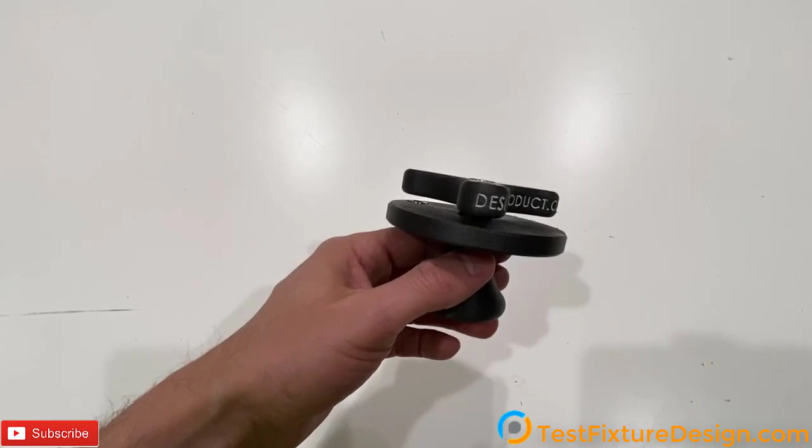Although we specialize in medical device test fixtures at Pipeline, every now and then we like to send our customers gifts. Check out the custom-made triple threat fidget spinner, made nowhere else other than us. So number one, you can spin it like a fidget spinner, but then it snaps into place due to magnets.

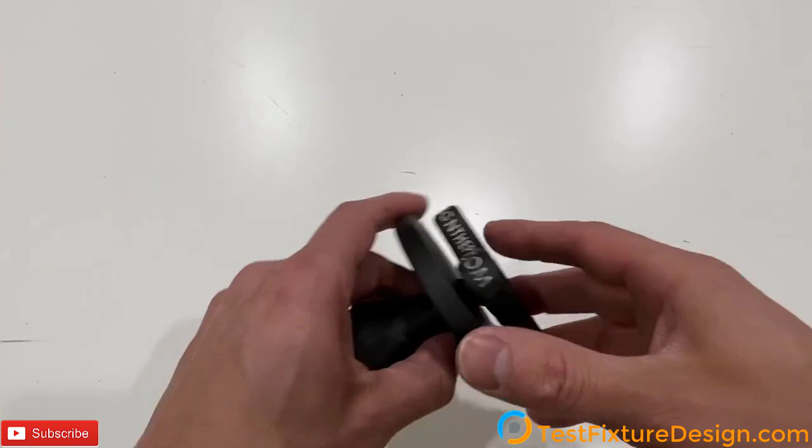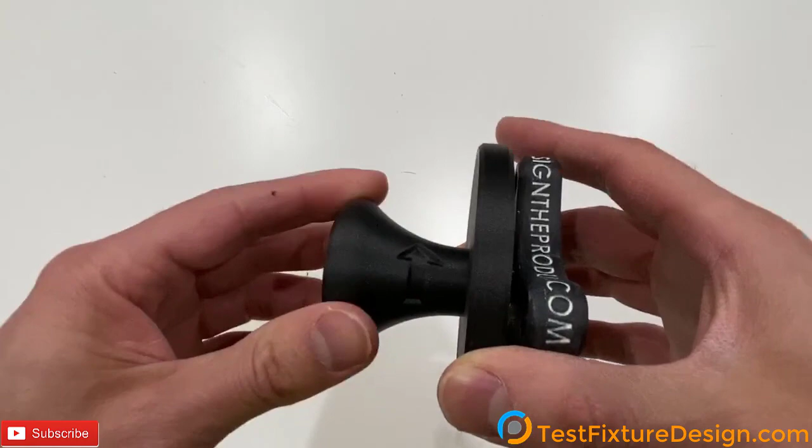Number two, you can twist it and it snaps due to magnets in the bottom. Gives you that satisfying snap that'll keep you snapping all day long when you're in your phone calls. Number three, due to the rounded designs in the bottom, if you spin it hard enough, it turns into a spinning top.

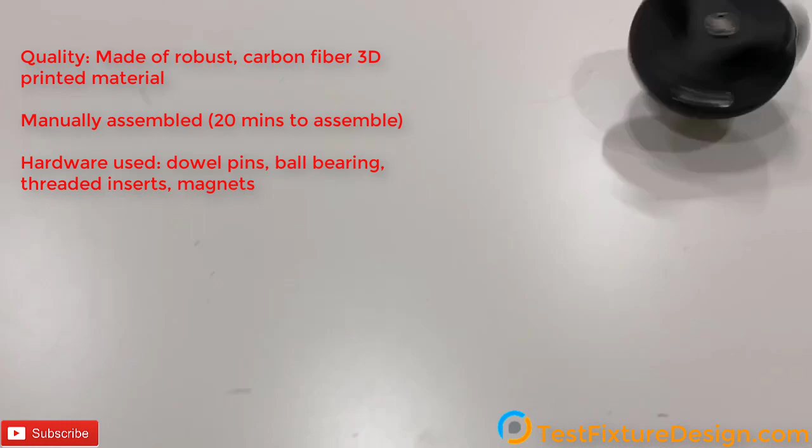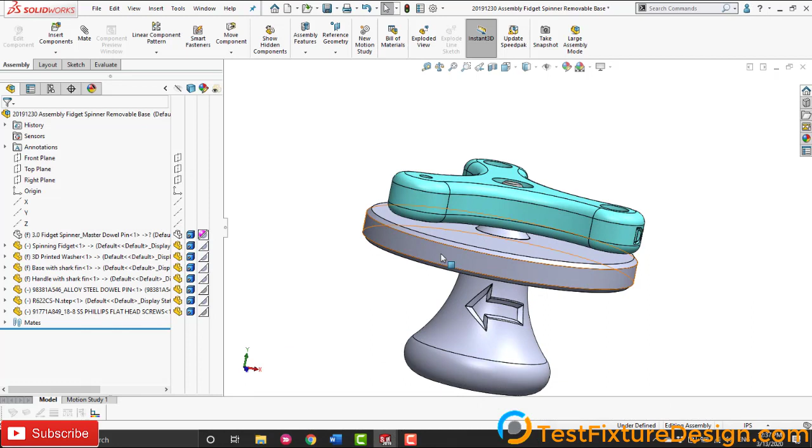Let's take a look at the CAD model and some of the work that was put into designing this. So here we have the assembly file, and please let me introduce myself. My name is Rafael Testay, and I'm a mechanical design engineer here at Design The Product Design and Engineering. I wanted to put a face to a name, and a face to a voice rather, so that you can know who I am and we can start building that personal relationship as you watch our videos.

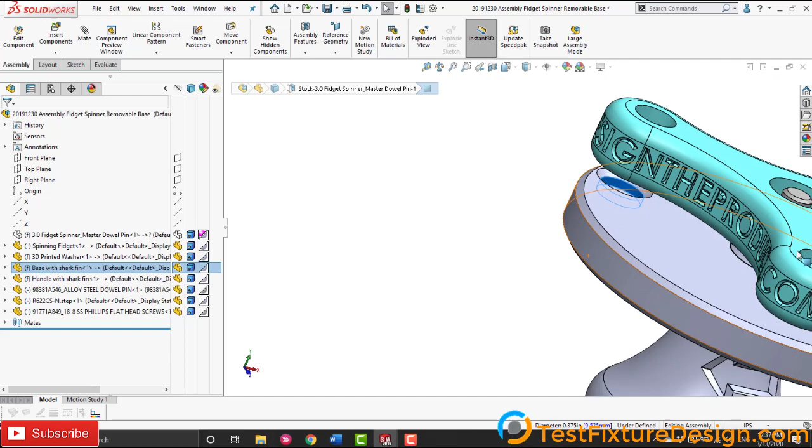So the assembly file, here it is. It's mated, and it should function like it functions in person as it spins. But you may notice that some of the hardware is missing, like the magnet that goes in here. There's a magnet that goes under one of those arms. There's a ball bearing that's also not here.

So why is the ball bearing not here? Because we got the ball bearings off of Amazon, because it's cheaper to get those ball bearings instead of from other providers. And Amazon doesn't have a CAD file for those ball bearings. But as long as we have the measurements, it's totally okay. So that's why that space is missing.

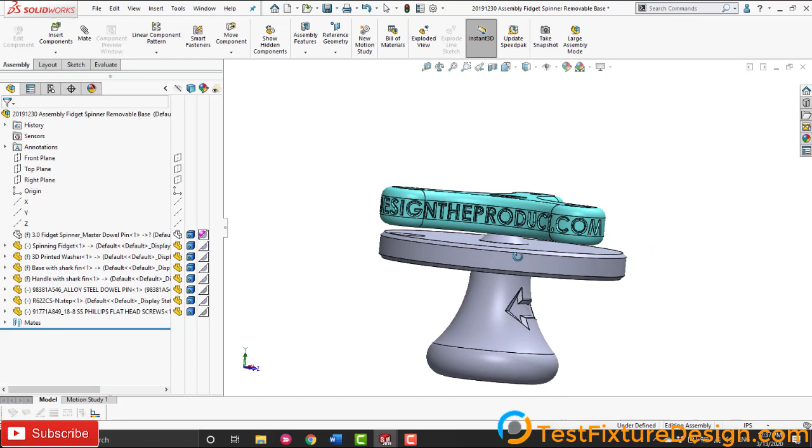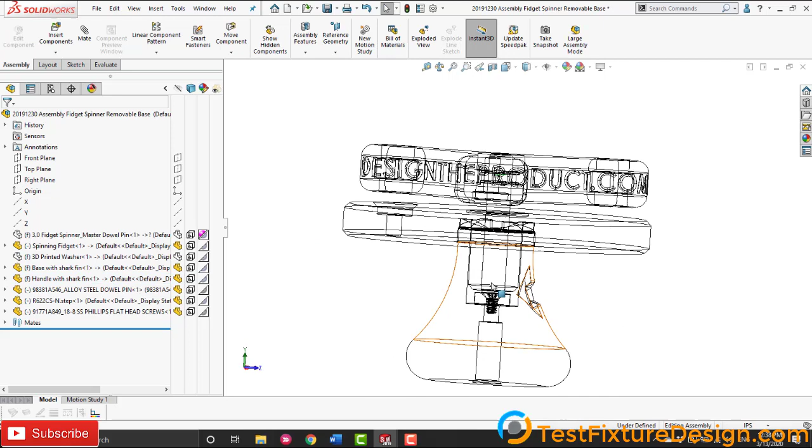So let's take a look at how everything functions. We have a washer that was 3D printed. So let's start hiding some of these components. And we have the disc here, the ball bearing that goes through, the dowel pin that goes through. And let me take a look at this in the wireframe view so now you can see what's going on inside. See that dowel pin going through?

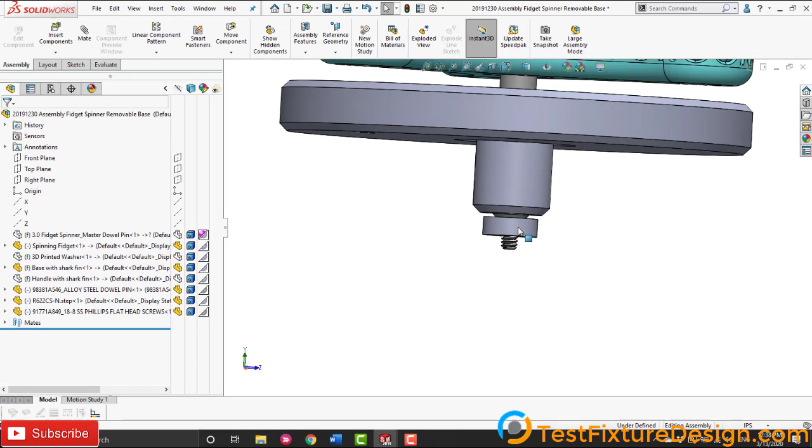And there's going to be a threaded insert here with a screw, and this is another magnet that's coming in contact with the dowel pin. And let's add some color to this or bring it back to normal. And there it is. See, there's a magnet inside that bottom part, and that's coming in contact with the dowel pin, and that's causing the magnet to stay. It gives you that satisfying feel when you take out the base and you put it back on.

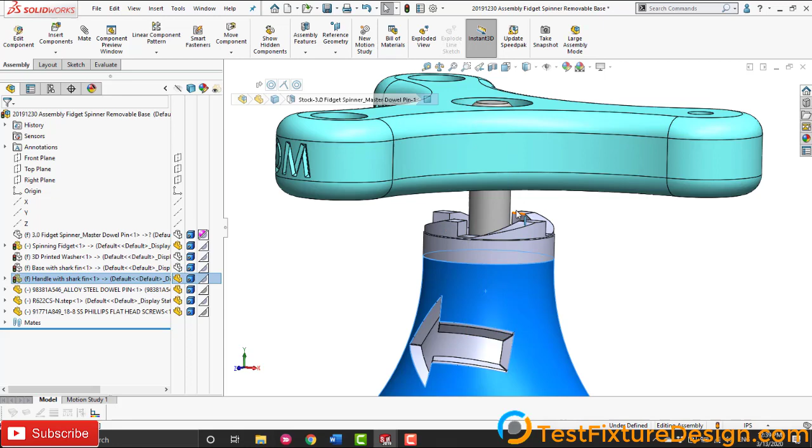Now, one of my favorite things is the design that I made for these shark fins. So when you spin the base, highlighted to the left, the fins will cause it to move in the upwards and downwards motion. And that's going to create that snapping sound that I showed in the video before. So this is the assembly file. Let me show you what I did before this to get to the assembly file.

We do something called master part modeling, and it's just a part file. And all these sketches are here, and we build all the parts in one part file, and then we do save bodies.

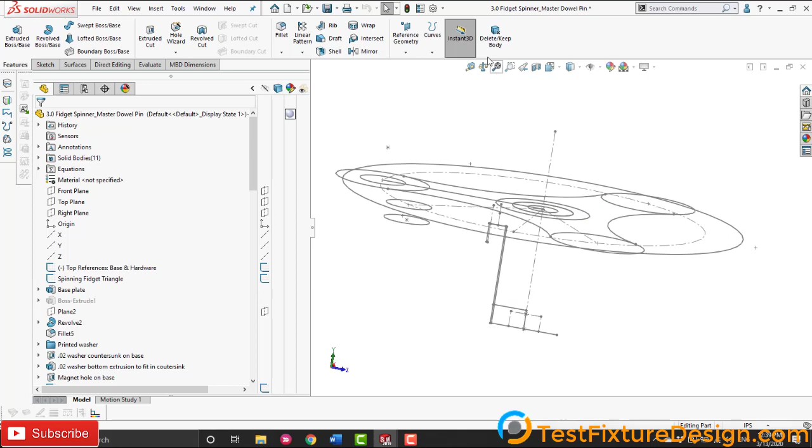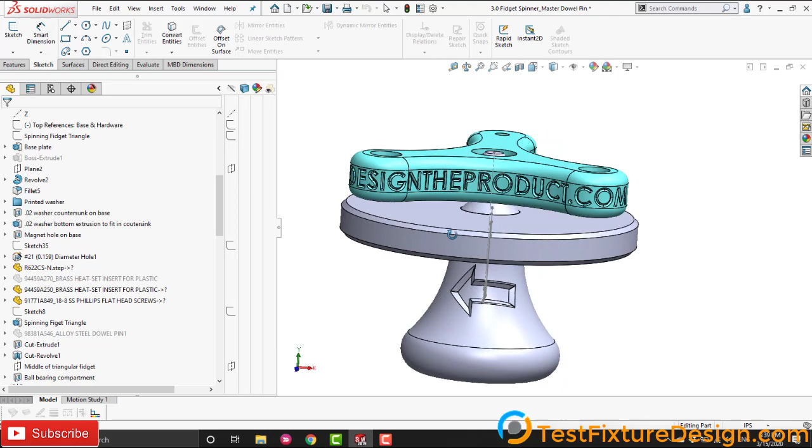So I'm going to show you the three most interesting things about this CAD model, at least the ones I thought were the most interesting. So this washer is 3D printed. And the way that you have to make this washer in order for the fidget spinner to spin and work is when you have a ball bearing, the top surface of the washer can only interface with this ID of the ball bearing.

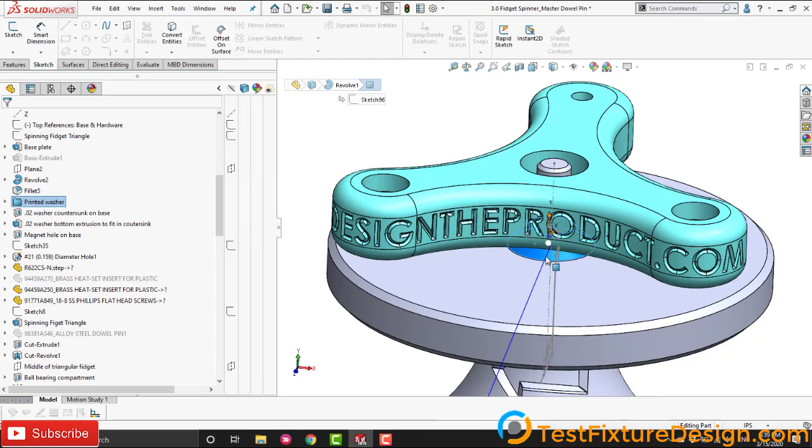If the top surface of the washer touches both the ID and the OD surfaces of the ball bearing, it's not going to be able to spin. And I figured this out by disassembling a fidget spinner. So it works appropriately, like I showed in the video.

Feature number 2 that I want to show you is this text that you'll see here.

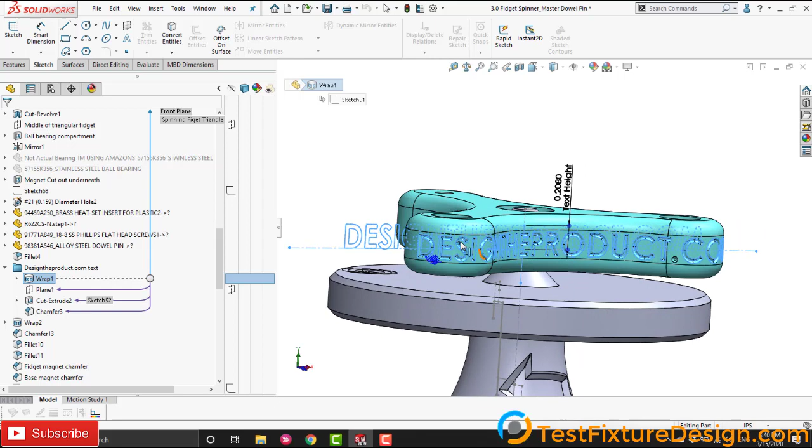But the text is a wraparound text. You probably already know how to do that, but there's a more interesting thing about this, is that we put 45-degree chamfer cutouts so that none of these engravings need support when they're 3D printed. So that gives it the correct finish. It doesn't give it a rough finish, and it saves material. So that's a nice little tip that you'll be able to see how we did that once you download the file here. Now I'm going to show you my favorite feature of the whole model.

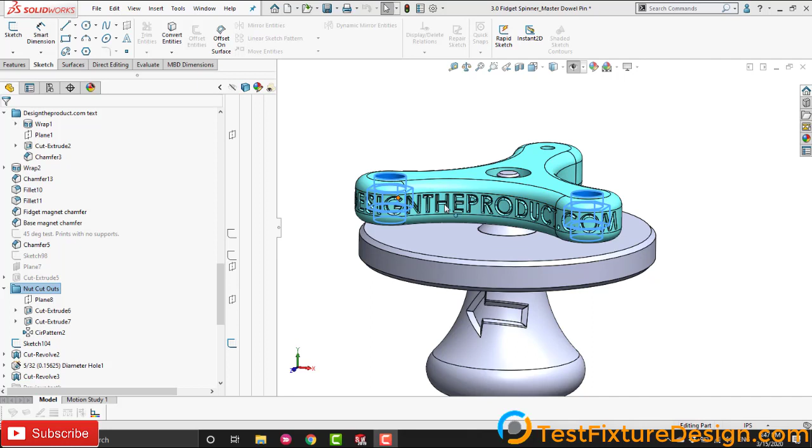So we wanted to add weight at the end of the arms of a fidget spinner. So we decided to do something pretty creative, which I'm very excited to show you. So we did some nut cutouts, and then we got 2 nuts, and then we put them in the spaces that we cut out, and then we resumed the printing job. So here's the cross-section view, so you can see there are cutouts that would fit a nut off the shelf. See the cutouts? An actual nut goes in there.

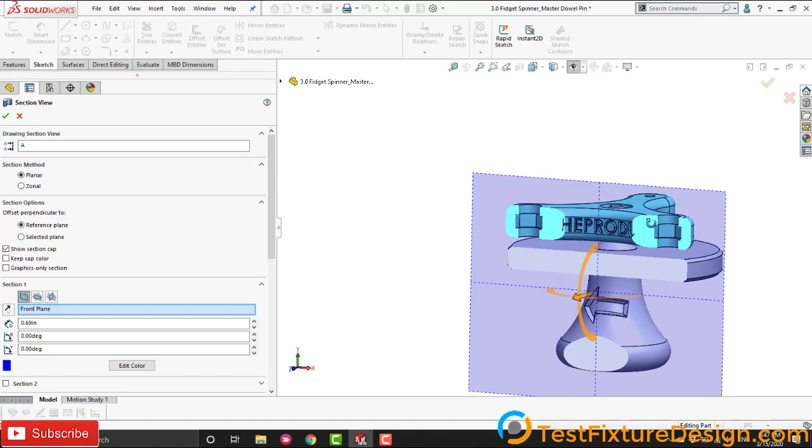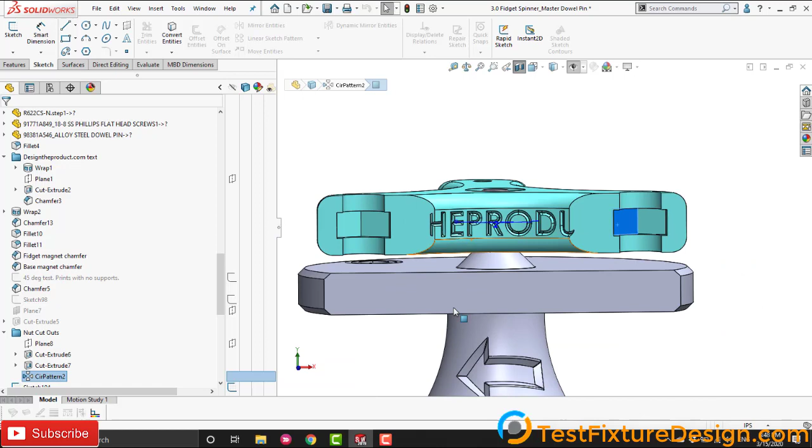We don't have the nut file here in the CAD model, so let me explain. So the first thing we did was the cutout for the nut, and then we went to the 3D printing settings, and we told it when it got to this layer to stop printing, just pause printing. And then we went physically to the printer, we opened the printer, and we placed one nut here, and we placed another nut here. Imagine it's all a flat surface until then. And then we clicked a button that said resume printing, and then it went back to printing layer by layer.

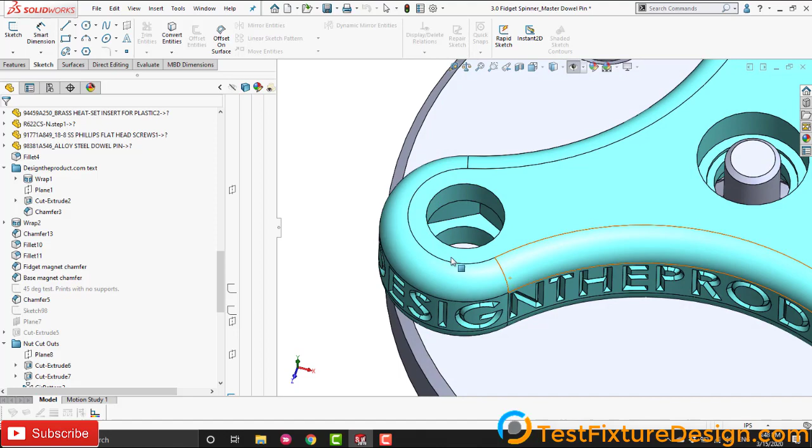Now what that did, it added weight at the end of the arms of the fidget spinner, and it locked the nut in place. And we thought that was pretty cool. That's a little bit of an example of how we pay attention to detail here at Design The Product. And most people won't even notice. They won't even know that there's a nut on the inside, but everyone that watched the video knows and could appreciate that.